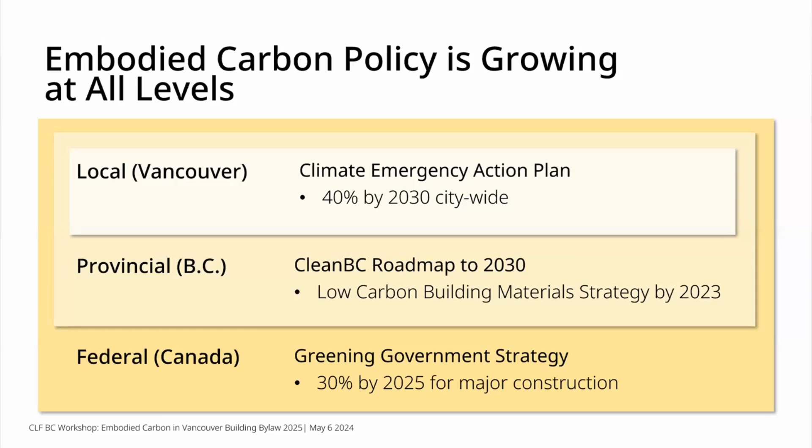So these are just a couple of examples. The federal government, for example, as part of their greening government strategy, has the target of reducing the embodied carbon of major construction projects, the federal projects, by 30% by 2025.

So for us, City of Vancouver, as part of our climate emergency action plan, we identified a few major actions. We call them big moves, and big move 5 basically addresses embodied carbon, which sets the target to reduce embodied carbon by 40% by 2030 for all the new buildings in Vancouver.

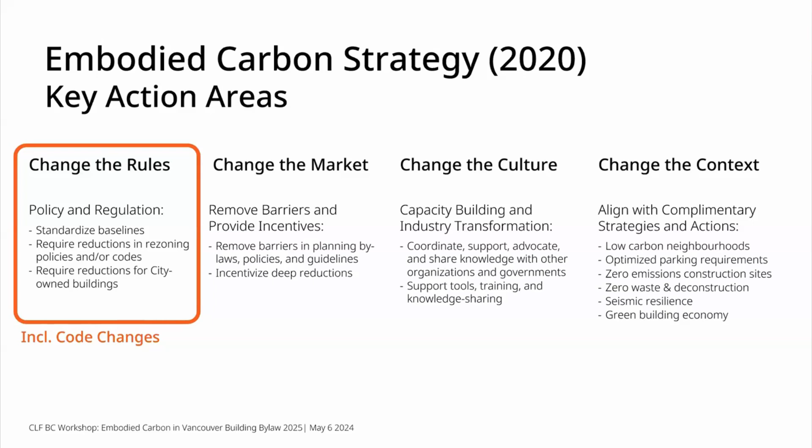The climate emergency action plan was released in 2020, and as part of it we also had an embodied carbon strategy alongside it, which identified the way we are going to achieve that target. We identified 4 key action areas. One of them was changing the rules, and that relates to the zoning, the codes, and the requirements that the city has, both for city-owned projects and also for all the other buildings in Vancouver.

The first step we took was back in 2022. We approved the first step, which came into effect last October 2023, where we started requiring embodied carbon reporting and set the first limit, which was less than double of a baseline following the embodied carbon guidelines. At the same time, we also brought to council our recommended approach for the 2025 step, which was approved in principle, but the details were to be brought to council later this year, which is exactly what we are sharing with you.

What we initially proposed was a 20% reduction for buildings that are up to 6 stories, basically lower rise buildings that can be built with wood, and then 10% for all the other buildings.

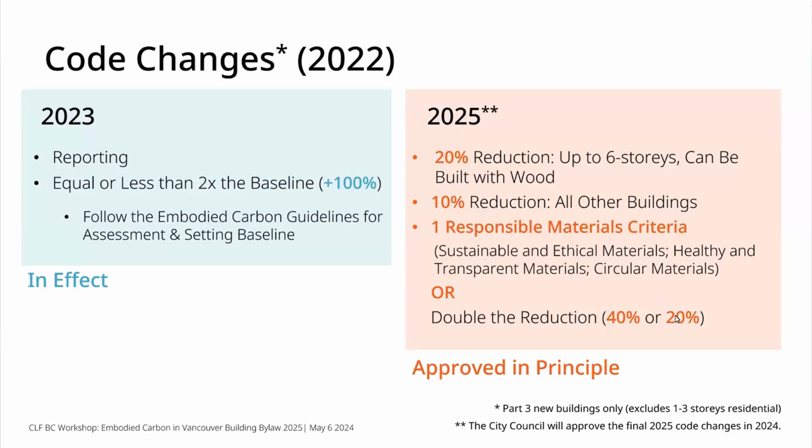We also had this requirement of responsible material sourcing criteria, a set of criteria we thought important to material sourcing and embodied carbon, but not very well addressed in the current systems that we have for embodied carbon assessment. So we proposed that each building meet one of those criteria or double the reduction requirements, which would bring the wood building requirements to 40% and all the other buildings to 20%.

We are very excited to see that the guidelines have been received very well throughout Canada. The federal government is looking at it, and CAGBC is looking at it.

So it's good that it created this ecosystem of making sure we are all aligning, and if there are variations in the approach, they're very clear and minimized.

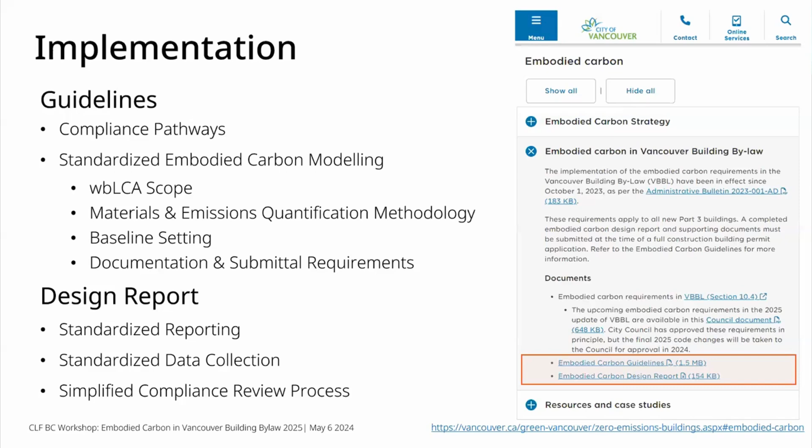This is all I have at this point. I'm going to pass it to our presenters to share their experience on how they have been assessing and reducing embodied carbon, how the current 2023 requirements of the Vancouver Building Bylaw may have impacted their projects, and what they see coming as we move toward the next steps.

After the presentations, I will come back and share with you our proposed approach for the VBBL 2025. What I would say is that I was quite excited to hear these presentations, and having the conversation with them, was to understand how these may apply to code.

So I'll ask you all to have that in mind as you're listening to the presentations, and then again I'll come back with the proposed approaches, and then we can discuss those further. With that, I'm going to pass it—let me actually first stop sharing my slide.

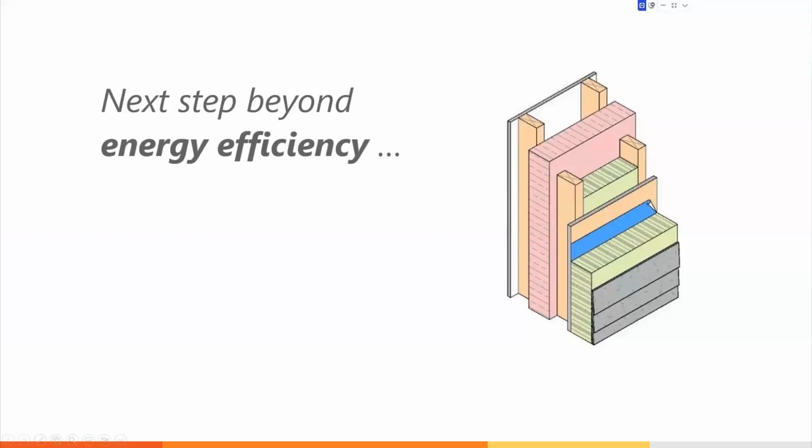Okay, can everyone see my screen? Doesn't... hang on, I think I got the wrong screen. Share screen. It's this one. Okay. Does that work? Okay.

Yeah, I'm Chad Cranswick, BC Building Science. Just want to share my experience as a building science consultant.

As you can see on the screen, this wall assembly was from a passive house we worked on many years ago, and it was kind of what started to push the passive house idea—what you'll notice is there's a lot of materials in it, a lot of wood and a lot of insulation, and that was to achieve the ultimate goal of super energy efficiency.

So this piece, embodied carbon, was in my opinion kind of missing from that, because those ultra energy efficiency single-goal ideas tended to ignore the responsible use of materials. So that's kind of what this is about.

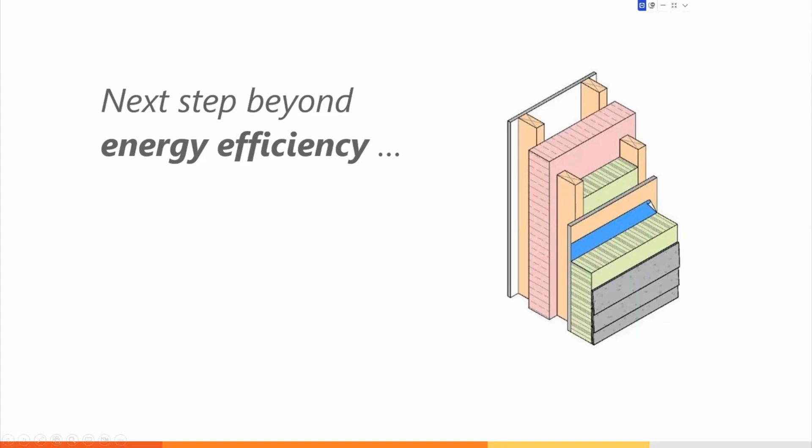So that's why I support what the City of Vancouver is trying to do here, or is actually doing. The goal is to focus not just on operations, not just operational carbon, but on materials as well. I think the two of them balance, and overall it's about responsible use of resources, whether it's energy or materials or anything.

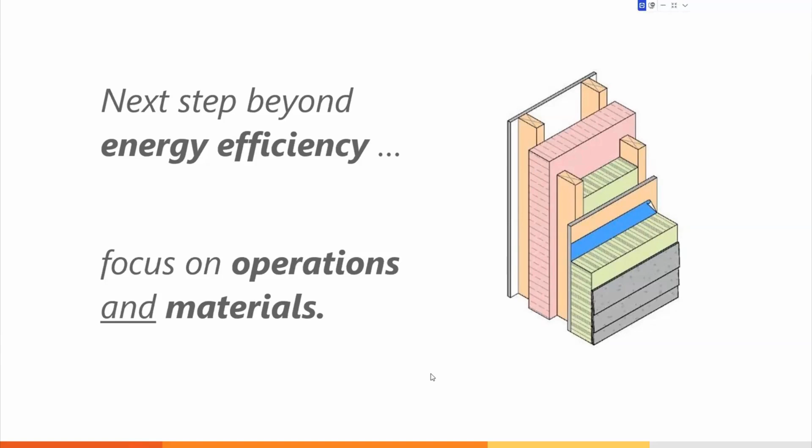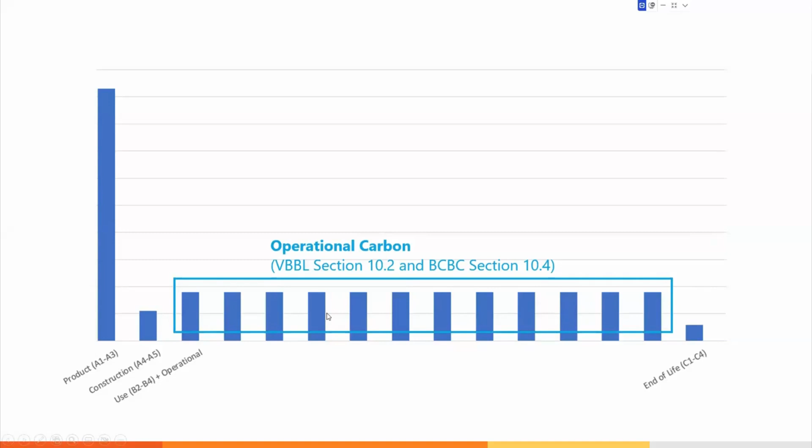This is basically operational carbon, what we've been dealing with over the life cycle of a building. These represent years or time along the bottom, and operational carbon is what we've been focusing on—that's what the step code deals with, trying to reduce the amount of carbon being used. The other piece is embodied carbon, and that's what's being addressed by this new—not so new—section 10.4.

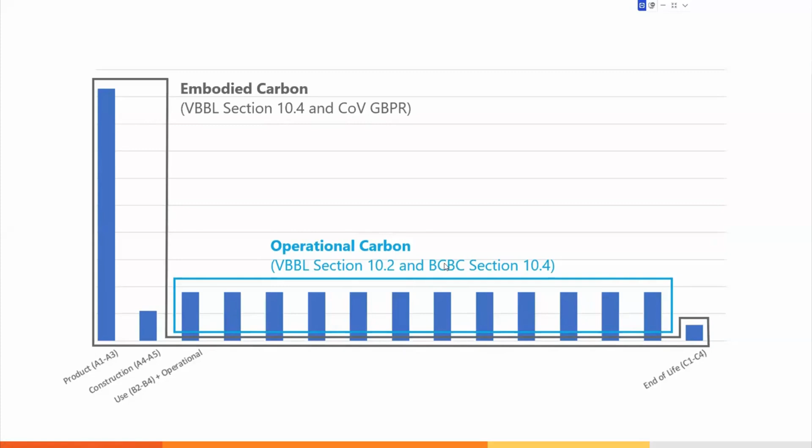And the City of Vancouver's green building policy for rezoning, which has been around quite a long time, but that's what it's trying to address. Does that make sense? This reminds me of financial plans, like a mortgage, where you have a high buy-in at the beginning, then smaller payments throughout.

So we just want to show two examples. One's a townhome, and this is a voluntary one we did internally. Townhomes, this type of building, actually wouldn't apply—as I understand, 1 to 3 story, it's slab on grade. There's not a huge component of concrete, but it was an interesting one.

This is a streetside Qualico development. We worked with E3 on it, and we basically did a bunch of presentations for the Township of Langley. I don't know if any of you were on them, but Streetside had agreed to turn a few blocks of the townhome development into step 5 net zero.

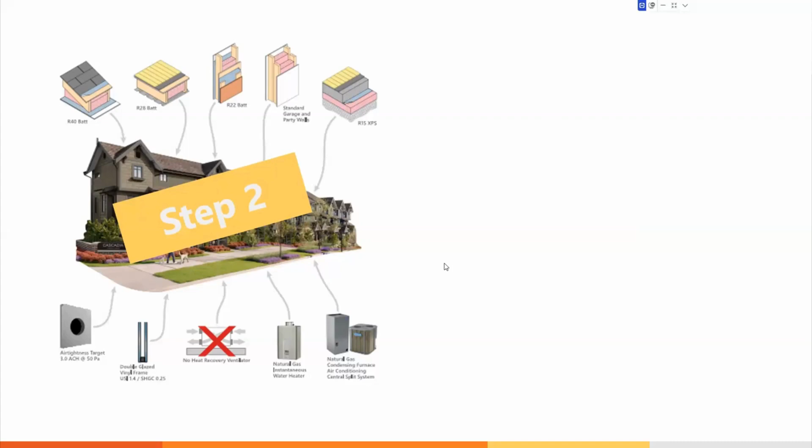Don't worry about all the details of this, but basically there's a step 2 block and a step 5—there's a few step 5s and a whole bunch of step 2s because that was the requirement. So the challenge was, how do we basically scale up the same architectural design, whereas a lot of the step 5s would be designed from the ground up and tend to form a certain geometry. We didn't have that luxury.

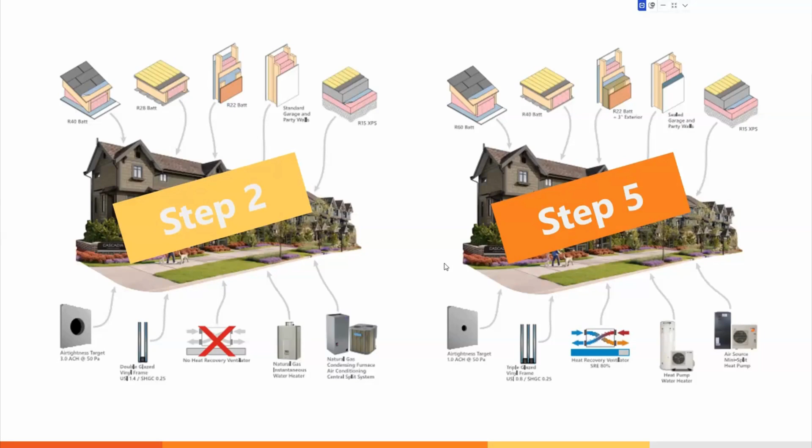So all we did was easy ones, like triple glazed windows and adding exterior insulation, but essentially they're the same, just with those few scale-ups to hit step 5. So we plotted them out together.

The embodied carbon: you can see step 2 is the yellow, step 5 is the orange. There's less investment in materials in step 2, because there's less stuff basically. But then over the life of the building, you're using less carbon, there's less carbon impact.

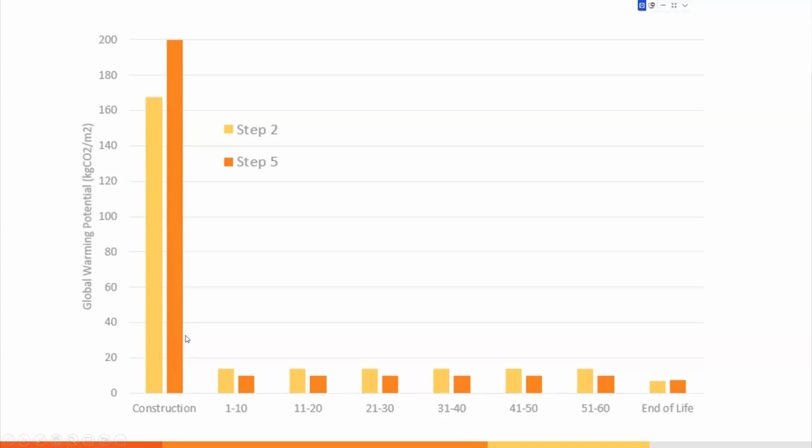So we thought if we add them together, we'll get the total. Step 2 obviously has total operational that's going to be worse, and step 5 is going to be better. That was the investment we made with this embodied investment. That makes sense, so embodied is of course higher on step 5 - there's more stuff, but there's the gain.

Thing is, when you put them together, you get an interesting result where there's actually a less global warming potential, less carbon essentially, on step 2 versus step 5.

Now there's an hour's worth of disclaimers about this, so we've thought about them all. This is how you calculate it, and this is the result you'd get if you follow the rules. But things like the embodied carbon calculation doesn't necessarily have a chance to be fully electrified, like construction, for example. So there's a lot of room there.

So as that gets a bit of pressure, you'll start to see these balance out a little bit better. Plus the error probably accounts for just that much. But the overall point is they're not that far off.

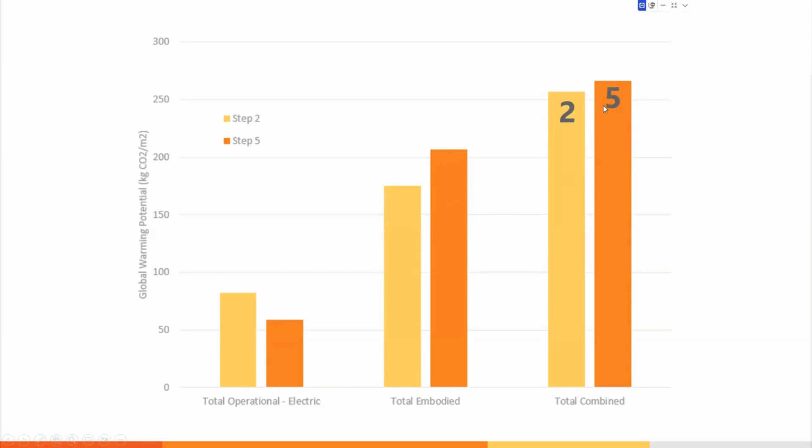So it makes you think, maybe, was it worth the investment? I think we've got to look at buildings a little bit more with it all in mind, not just drive towards step 5 so fast. Drive towards step 5, but do it with responsible use of materials. So there's a balance in there somewhere.

So let's look at a quick concrete one. I won't go through it too much, but we had the opportunity to model two steps - step 3 and 4 for a tower. This is all the details. Step 3, step 4: better air tightness, better walls, triple glazing. The details don't matter too much, but the solution is step 3 versus step 4.

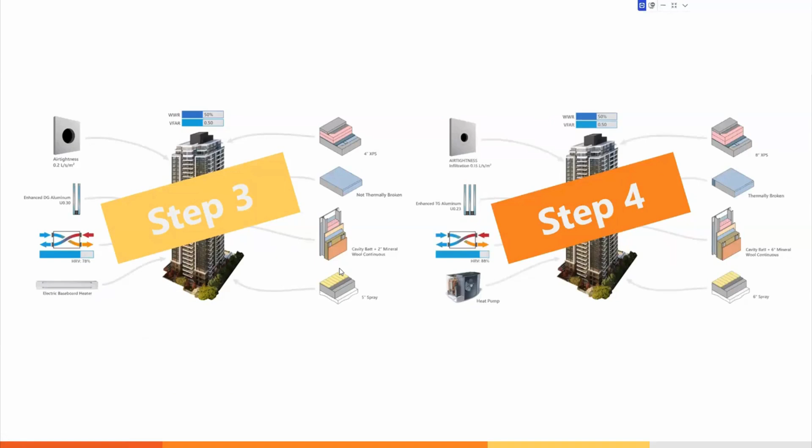So it's interesting - when it's electric, actually the lower steps have less impact. Very close though, and again there's disclaimers throughout, but they're kind of comparable. It's super clear when you get into gas though - when you take the gas and add it to the embodied, you end up with a huge incentive to go to higher steps.

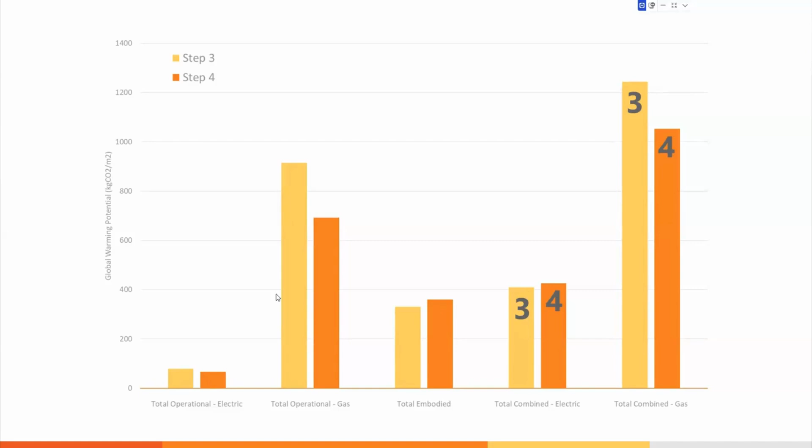So the underlying message is: if it's electric, it's less important, than if it's gas. But there's so much drive towards electric that we can actually start to think a little bit more about the materials themselves and driving that embodied down, because we've driven it down so much with the electrification of things.

That's all I wanted to say, and hopefully that was about 5 minutes. But again, overall, it's about, to me, pushing back on this ultimate idea of super energy efficiency, which is great, but think of at what expense - at the expense of too many materials in some sense. So that's it.

That's all I wanted to say for today.

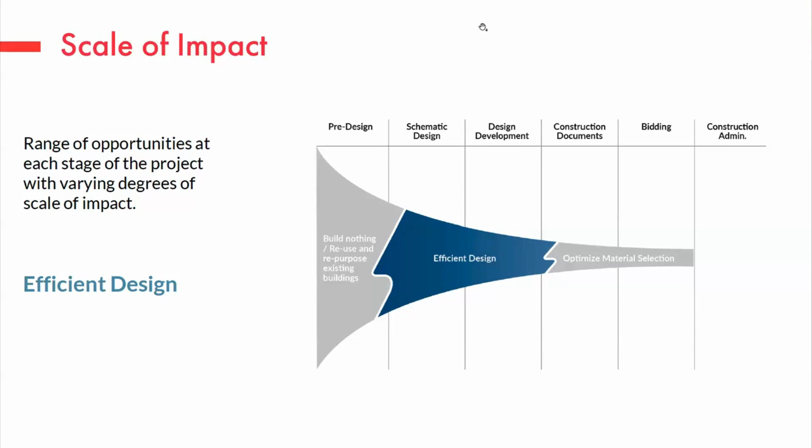Last but definitely not least is optimizing material selection. This really boils down to the selection of low embodied materials, such as low embodied insulation products, and or optimizing concrete mix designs.

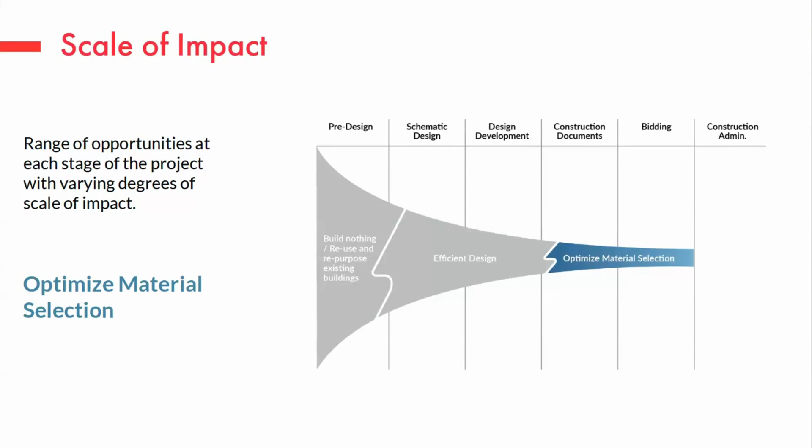We're going to walk through a couple of case studies now, and Amy's going to take the mic. Thanks, Iain. We just wanted to highlight two projects that we've been reporting on at ZGF that were demonstrating how projects were able to meet the 2023 VBBL embodied carbon requirements.

And one thing we want to highlight is that these initiatives have no projected additional costs to the project. So the first example we wanted to highlight - one strategy was, as Iain was saying, the volume reduction, and this was to do with the parkade.

So this project is the Vaha Seymour project, which is about a 9-story MURB building. You can see in the baseline we had 2 levels of parkade, so we were able to move to 1 level of parkade. That move in itself had a GWP relative to baseline reduction of 9%, which almost meets the VBBL requirements for 2023. That volume reduction is actually the most significant change that could be made on this project.

Then the second move for volume reduction was, as Iain was outlining, optimizing the structure, which involved reducing the slab thicknesses, aligning columns, and avoiding the transfer slabs, and that had an additional reduction of 3%.

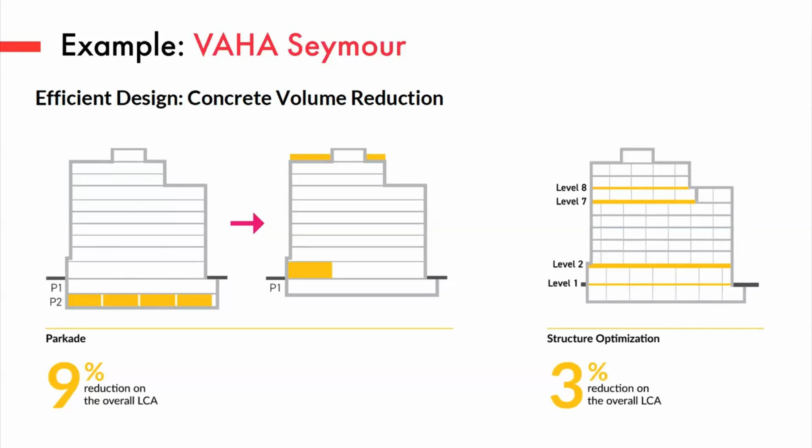Then we moved into optimizing material selection. The GWP from insulation was reduced in this case study by selecting just the CSA approved, Canadian sourced materials that already have a low GWP. We found that the GWP reductions relative to the baseline products could be as much as 80%.

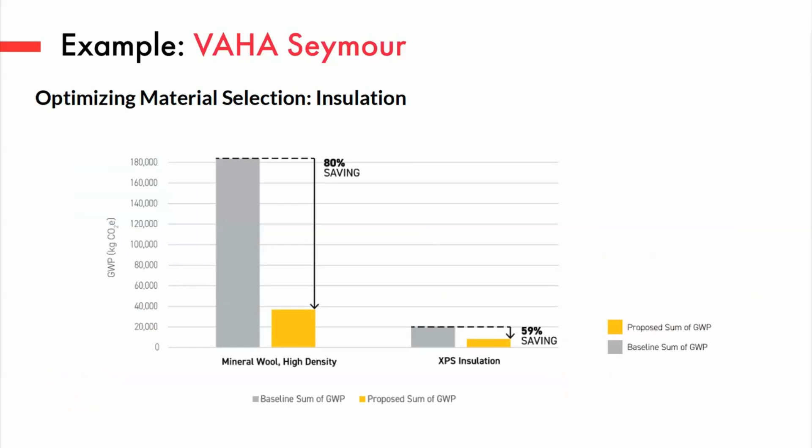So this slide is demonstrating the GWP savings from these different strategies we were highlighting here. The other strategy we incorporated into this case study was optimizing the concrete selection, which Iain is going to talk about in more detail.

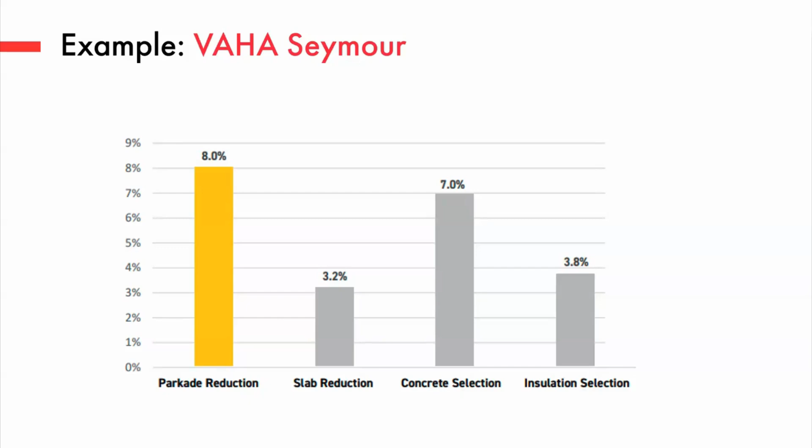Overall, when we did the whole building LCA, the results are showing the project's on track to achieve an overall savings of 22% reduction relative to baseline, so far exceeding the City of Vancouver's 2023 VBBL embodied carbon requirements. All of these options were done at no cost, and this case study is available on the City of Vancouver's website.

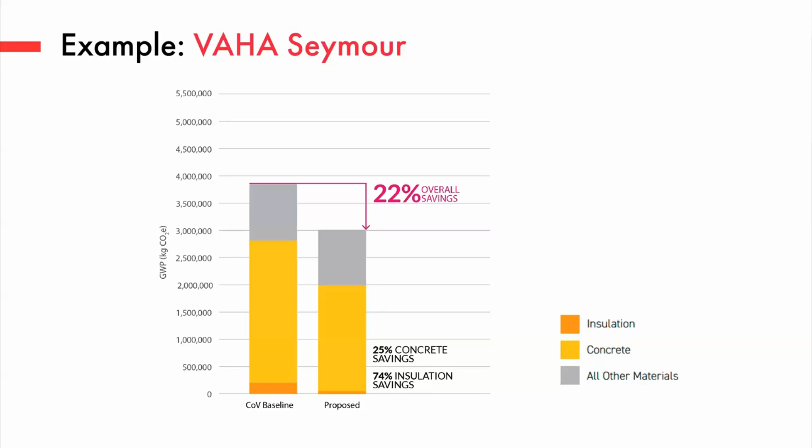Thanks, Amy. Just to reiterate that the savings for Seymour were at no cost, so the driver that we had on the project was to minimize any of the cost impacts associated with lower embodied solutions. So it really did make us think as a team.

This is a good bit of a break in terms of case study. One of the bits of pushback we typically get is concrete mix designs - it can't be done, it's going to cost too much, it's going to have an impact on schedule. So what we've been doing is pulling out those components and placing them into a performance matrix. This is a project from Surrey, so it wasn't meeting any City of Vancouver requirements, but it's the same thinking methodology that we use on all of our projects now - pulling out the constraints coming through from contractors and/or structural engineers and understanding what they are from a performance side of things.

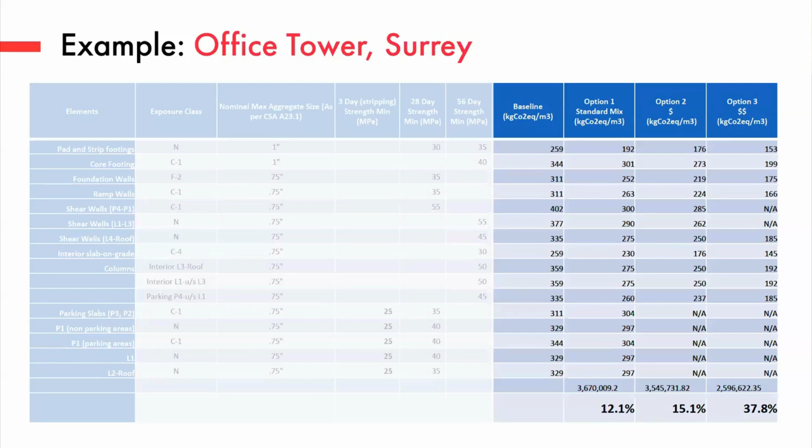We found that this has been pretty useful on projects. Ayme and I have got lots of examples, so we're happy to share after this. It was just a very quick 5-minute overview of some of the key lessons that we picked up. Thanks, Zahra.

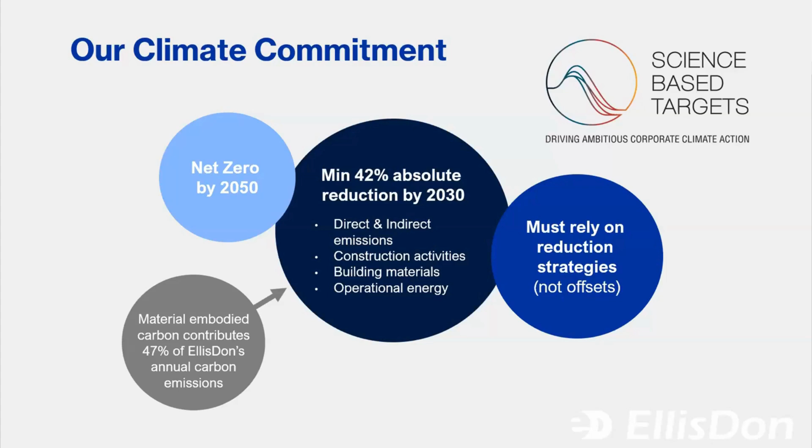We're really thankful for groups like CLF and the City of Vancouver for showing leadership and making it a lot easier for us to move the industry along this way. We like participating in events like this because we're all learning together and we're all moving it forward.

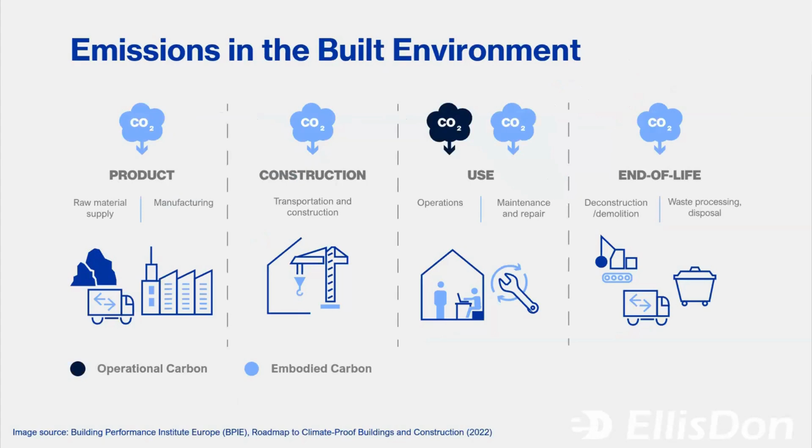So we've gone through this a little bit - what that life cycle stage is for embodied carbon. We know that we purchase products - that's the major part of the embodied carbon emissions, that first product stage. But also the construction stage is the one that us as a construction manager have the largest impact on. So I'm going to be talking about both of those.

This was touched on a little bit by Iain, and we'd see this from the consultants, but one of the biggest things we push towards getting the reductions that we want to get in a building project are performance-based specifications and not prescriptive specifications. As a construction manager, as a constructor, we need to buy what's in the specs - we are fairly constrained by that. Yes, we can have alternate conversations, we can do RFIs and all that, but it makes it a lot easier if the specifications are very, very clear about what they want from the beginning.

For concrete specifically, reductions should be mandated as a volume average reduction from a baseline and not mix by mix, if at all. You can give mix by mix recommendations, but we know that there are actual logistical constraints that happen when we are pouring the concrete on site and things that are very construction specific.

We would recommend that plant-specific EPDs be submitted. That really helps validate all the reductions being claimed, and it helps support the concrete manufacturers and plants. They've put the money in to get these EPD calculators, and we want to show them that we appreciate that. And then we want to avoid referencing specific technologies.

I know there's a lot of green tech companies out there saying really great things about how they're going to decarbonize the industry. Some of them are true, some of them are not, and we just want to keep the specifications technology neutral and more performance based. A really good example of this is the NRC's National Master Specification. Everybody in Canada has access to this, and they've provided a template with a performance-based section that's a very good example of how this can be written into specifications.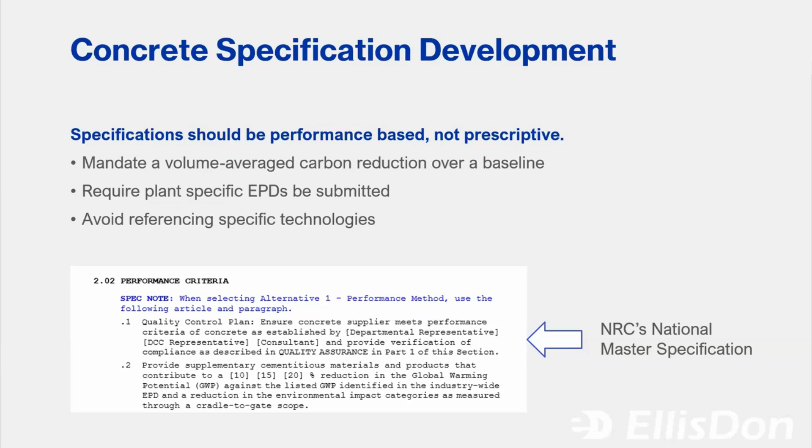Now, we know that there can be cost and logistic implications towards going to a lower carbon concrete. That doesn't mean there always is, but there can be. So in this process, what we're doing is having them submit their proposed GWP, or global warming potential, numbers, as well as any strength delay implications. Is it still hitting that standard 28 days or 56 days, or is it longer than that?

And if there's a cost premium or elevated cost per meter cube of concrete, then we're able to do a bit of picking and choosing from these unit rates to figure out the best way to get that lower carbon concrete on site. Or we can go with those unit rates going forward if we realize we need to tighten a little bit because something came over in an unexpected way.

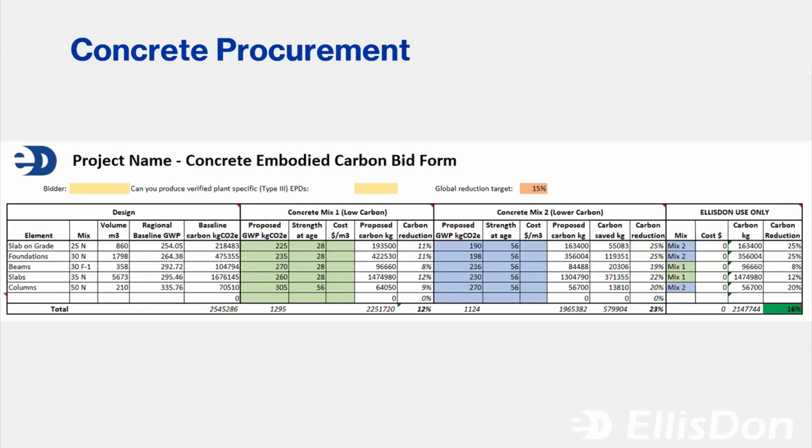And they want to know, hey, for how much more money can I reduce the carbon this much? And does it make sense for their project? Because you can buy offsets and stuff, but the best carbon is the one that you don't emit in the first place.

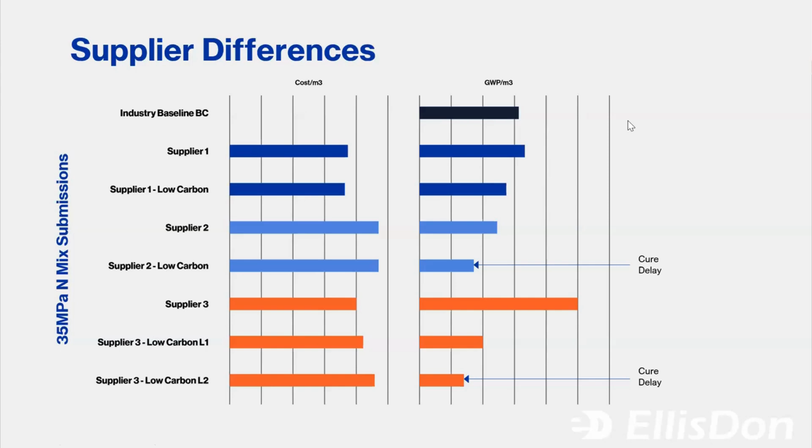So it allows us to be smart, basically, about the mixes we're picking and over the course of the building, getting those reductions that we need.

Of course, it's not just concrete. There are other materials to consider, the largest being structural in terms of embodied carbon density. So for metals, that's something we're working through a lot right now. We've seen some huge improvement in the industry over the last 12 months, honestly.

And we're seeing metal mills, brokers, and fabricators advancing their understanding of embodied carbon and the accessibility of the data. Largely, the data comes from the mills themselves, and then there's just a percentage increase applied for the fabricators. But mills vary widely depending on the location of their plants, their energy source, what kind of furnace or metal production system they're using, and also the percentage of recycled scrap in their metal.

So starting to ask for that information is really important. Other materials should be considered more in the design phase.

It is very much supplier to supplier dependent here, and there's not enough good quality data at this point in time to write procurement stuff into the specs. You might be reducing yourself to one supplier at times, though as the industry advances, this will change.

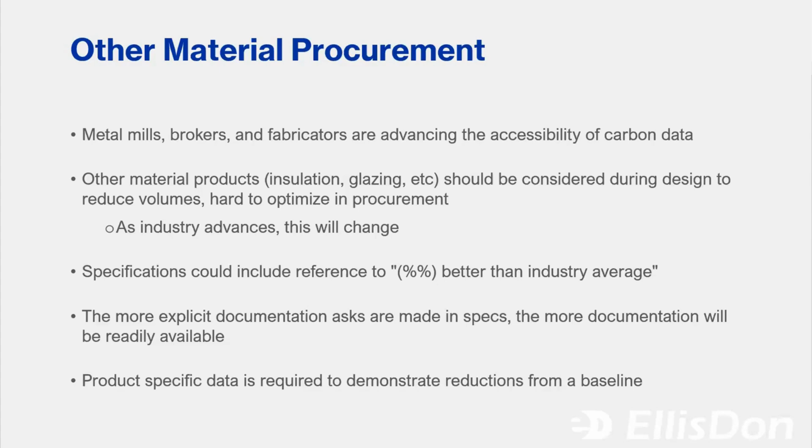Something we see frequently, especially in metals, is we'll ask for an EPD and we'll get the Canadian or American average EPD coming back to us, which is great if you're doing compliance things for LEED, but a baseline, an average baseline, can't show a reduction from an average baseline. So you do need that product specific data.

Finally, as I mentioned, I will talk about the transportation and installation materials. Construction stage data is very weak in the industry. It relies on estimated factors, and those factors vary from software to software, and there's very little consistency and very little understanding.

So the City of Vancouver wishes to better understand the real world impacts of construction processes and is incentivizing that developers and constructors track and disclose this data. I know that Zahra will talk about it a bit later, but when combined with other initiatives, up to a 5% leadership credit is available, and some of that is for tracking that A4 and A5 emission.

Currently, EllisDon is running pilot projects around the country, including many in the Vancouver area, for tracking those on-site emissions. Deliveries to site are A4, and fuel and power used on site are A5.

In order for us to get this data, what we do is we tie it to the monthly billing. It's part of our baseline contracts, though we only activate that on specific projects with the goal to eventually have it active on all projects across the country. We do tie it to the monthly billing because everybody wants to get paid, and it's a lot easier to get that data submitted when there's a little bit of a stick.

But also some of that data can be streamlined with logistics software, particularly delivery scheduling software. So in the Vancouver area, when there's going to be a lot of zero lot line projects or just issues with backing up on the streets, some of you might be using logistics software already. Examples are Voyage Control and StruxHub, and we are working with those companies to make sure that they have a way to track the carbon emissions associated with the deliveries.

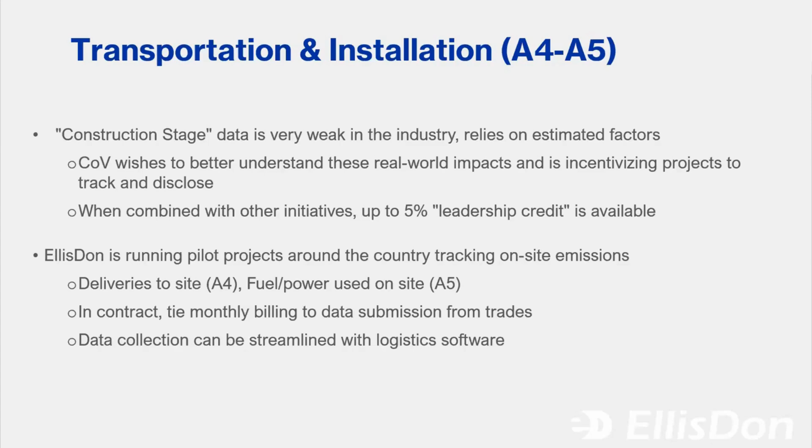We're not the first company to do it. They do have experience doing this, but we're working with them to streamline as much data collection and put as minimal a lift on the level of effort needed from project teams as possible.

Just a little bit of a show about what that tracking looks like. We have kind of a template data set up so that we can see the output of this tracking. How does it change from project stage to project stage?

What this does is that it really can help project teams identify carbon hotspots, and then put money or effort into the most impactful ways of reducing this carbon. It also can help initiate policies to reduce any carbon wastage. Examples of this would be anti-idling, battery power, faster grid connections, formwork heating, kind of all of those things. Things that are part of the construction process, but we might not be thinking about because we just have to do this to keep moving. If we're able to take a step back and see, wow, there's a big impact from this decision that I didn't really consider, we might make different decisions in the future.

So, just to clarify what we asked the subtrades to report in terms of fuel, and what we track ourselves, is any fuel consumption on site—liters of whatever kind of fuel, be it diesel, propane, that kind of stuff—as well as our energy purchases or usage. So if we have the data, we collect electrical grid connections or any fuel we buy to operate any of the equipment on site.

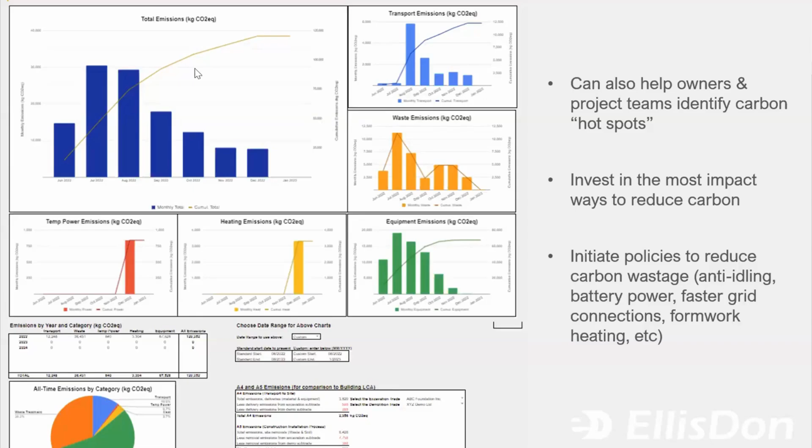And we are looking into alternative power solutions like hybrid generators or solar on site, that kind of stuff. We have some early stage pilots around the country working on that. And yeah, that's my presentation. Thanks.

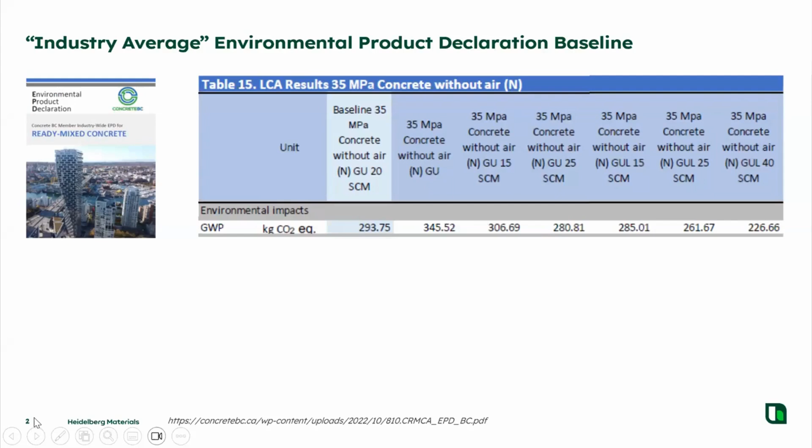But it's important to get a sense of how these reductions are both achieved and measured. The benchmark that the Vancouver Building Bylaw is using for concrete to demonstrate reductions against is the document highlighted here on the screen, the Regional Industry Average Environmental Product Declaration for ready-mix concrete. There's a lot of background into what exactly that entails, but essentially it's a report that outlines the environmental performance and carbon intensity of typical concrete mixes throughout British Columbia, including a recommended benchmark, highlighted in blue in this chart, as well as several alternatives concrete producers can point to as being indicative of their performance based on slight variations to the overall mix design.

Highlighted on the screen here is an example of a 35 MPa concrete application with no air entrainment, similar to what you'd see for an interior floor slab. The base mix for this concrete includes ordinary Portland cement, type GU cement, and 20% supplementary cementing materials, which would be either fly ash or slag, most generally in the Vancouver market. As a result, the carbon intensity of this particular mix is 293.75 kilograms of CO2 per cubic meter, and that would be the value that ultimately informs a whole building life cycle assessment's baseline calculations alongside all the other concretes and building elements that make up that project.

To demonstrate reductions against this concrete mix, concrete producers in Vancouver could go further to the right on this chart and show a 10% improvement on carbon intensity by testing that their mix will utilize Portland limestone cement, type GUL cement, and slightly more SCMs at 25% substitution. In British Columbia today, if a concrete producer is using local cement, Portland limestone cement is now the standard, so the cost implications of this move are essentially cost neutral. Similarly, with a 5% increase in total SCM use, you're going to see a 0 to very marginal cost increase, depending on the producer and their own supply chain considerations. Essentially though, 10% carbon reduction with concrete is possible at a very low cost, which generally means about a 5% reduction on the entire building.

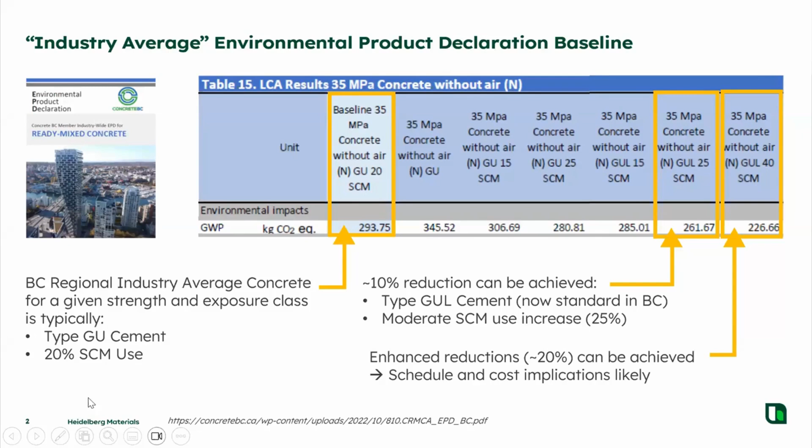Taking a bit of a step back, looking at where the industry is relative to the rest of Canada, we've come a long way in recent years. British Columbia has demonstrated a very significant reduction in average carbon intensity of concrete when compared to the Canadian-wide industry average report that was generated back in 2017.

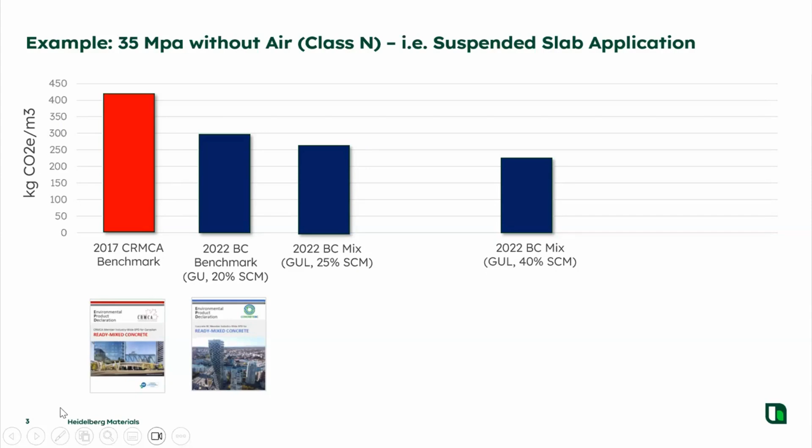In fact, British Columbia is among the lowest carbon concrete in Canada as it stands, largely due to the use of local cement production and some of the geographic advantages from a climate perspective, and the transportation of raw materials, such as water-based transportation of aggregates, at a lot of our concrete facilities. Picking up from our industry action plan, which Matt Dalkie is going to delve into in more detail, the cement plants in the Lower Mainland are already producing Portland limestone cement as a standard and utilizing lower carbon alternative fuels to reduce combustion emissions. This has resulted in relatively low carbon cement versus the rest of Canada, but also indicates that much of the low-hanging fruit that exists for the cement industry elsewhere in the country has already been taken advantage of in the Lower Mainland.

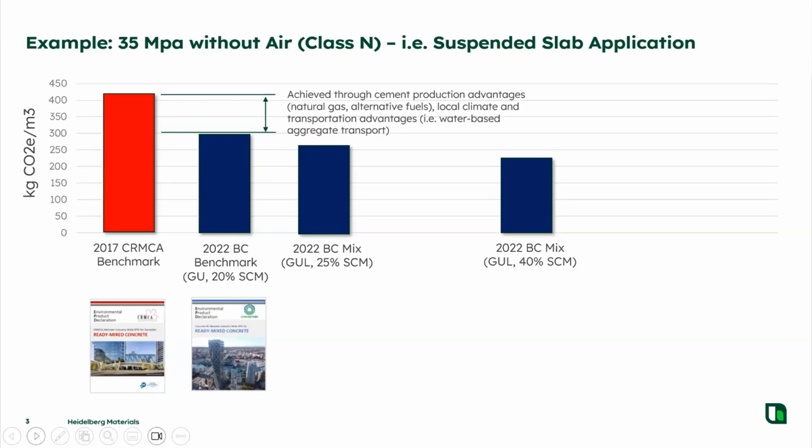On the screen, we can see how the BC regional average concretes highlighted from that last slide compare against the past.

Each supplier is definitely going to have their own capabilities and supply chain considerations. But again, if we work directly with designers and contractors to achieve the targeted level of carbon reductions, we can manage the schedule and cost implications to best suit a given project.

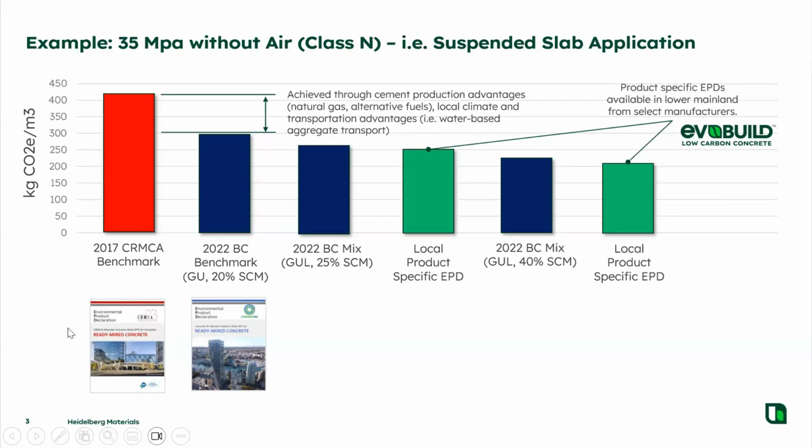In the not too distant future, cement and concrete will soon be able to deliver even more substantial carbon reductions across Western Canada. A number of carbon capture, utilization, and storage projects are currently under development across North America, including Heidelberg Materials' Edmonton, Alberta facility, which is currently targeting completion by 2026. This is a first-of-its-kind project that's going to see the capture of 1 megaton of carbon emissions annually from the cement production process, ultimately enabling net zero cement production by 2027.

While this product is much more likely to have a substantial cost impact at a product level versus some of the other alternatives we're highlighting here today, it still has the potential to reduce the carbon emissions of a project by up to 50% at a relatively minimal project level cost. I understand this isn't necessarily a pathway everybody's going to choose for their given project, but it does demonstrate the cement and concrete industry's readiness to provide solutions to support performance against embodied carbon regulations coming out both now and into the future, as they continue to grow more stringent with time.

So with that, happy to turn it over to the next presenter, and thank you very much.

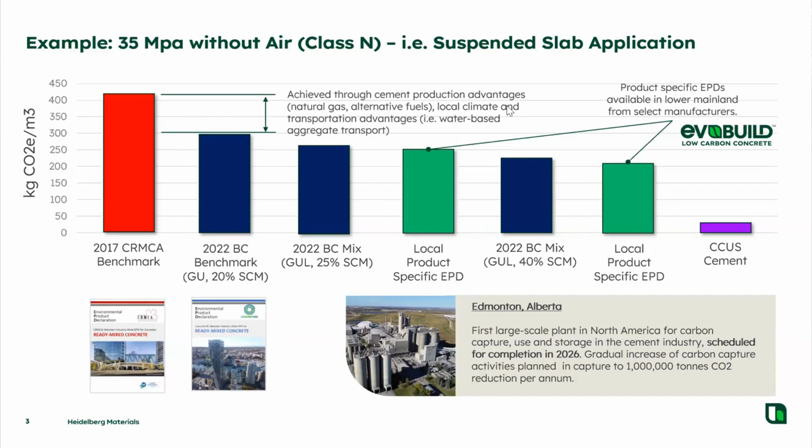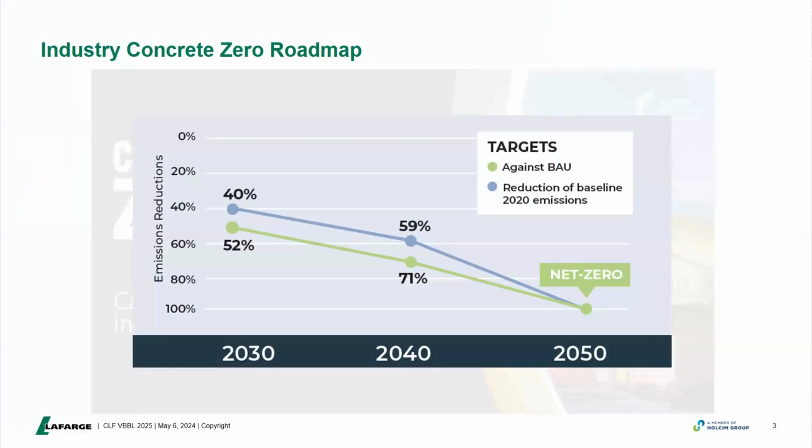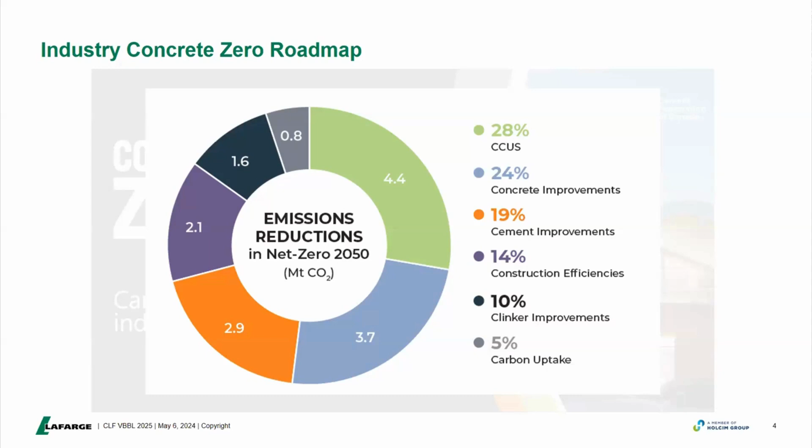That reduction is broken down into a number of different areas of specific interest to the Vancouver area, and the bylaws will be cement construction efficiencies and concrete improvements - the 3.7 and 2.1 in purple. Those have the most impact or influence as far as the policy that Vancouver is putting in place.

As far as recommendations for policies, from a Lafarge perspective, we recommend that any policies are material agnostic and should treat all structural materials equitably, and focus on performance outcomes. In this case, we really want to focus on functional equivalence of different building systems.

We recommend that policies strive to recognize improved structural resiliency. By this we mean that if you are building a building out of a combustible material, for example, or something not as durable as concrete, that is recognized - if there is a wildfire, flooding, or earthquake, different structural systems will react differently. When you're looking at concrete, that tends to be much more resilient, and we're able to return the structure to use earlier after a significant event.

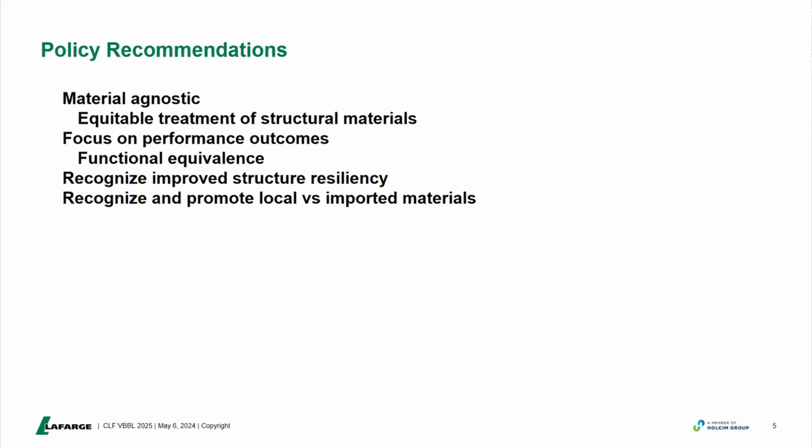We also want to promote local versus imported materials and recognize that as well.

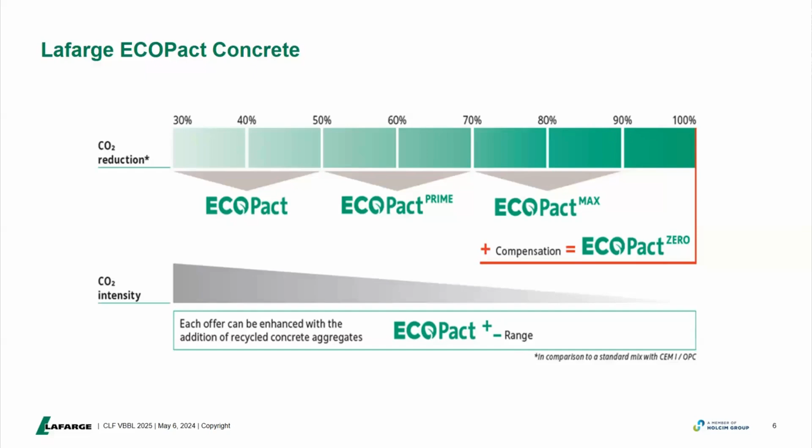Now, Shane did point out that Lafarge does have our EcoPact range of concrete. We start on a basis of straight OPC cement as a comparison. A 30% reduction versus OPC cement brings our EcoPact product. When we achieve a 50% reduction, that's our EcoPact Prime product, and 70% and above is our EcoPact Max product. That's the different ranges we have, similar to what Shane was showing before as far as the numbers you see in EPDs.

Just to look at those in a little more detail - the reductions are achieved through the use of GUL cement, which Shane was talking about. We leverage our experience over several decades of concrete production and optimize the use of the types of aggregates we are using and how they are blended together.

Our production in the Lower Mainland predominantly uses NewCem SCM, a slag-based SCM, as a way of reducing the cement content in the concrete. We also leverage our experience and partnership with admixture suppliers to optimize the use of admixtures to further reduce the amount of cement in concrete.

As far as costs go, generally speaking, for our non-EcoPact concrete, they tend to have somewhere in the order of 5 to 10% embodied carbon reduction compared to industry-wide EPDs. But when looking at higher reductions above that and using EcoPact concrete, costs can vary depending on strength class. We recommend from a budgeting perspective to allow for a 5% increase in cost, which should more than cover the potential elevated costs for using EcoPact concrete.

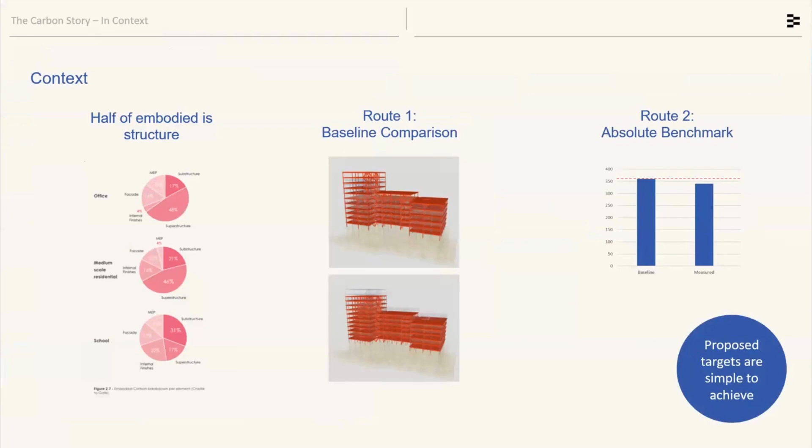As context, there will be some parallels with what people have spoken about before, but generally speaking, for buildings, particularly Part 3 buildings, embodied carbon of the structure is going to be at least half of the total embodied carbon on the project. It varies a bit depending on the scale of the building, but that's a big part of why reducing carbon in the structure is seen as critical to hitting those targets.

Building on the information Zahra was talking about earlier, the proposed clauses that are part of the 2025 Vancouver Building Bylaw give two routes for projects to demonstrate embodied carbon compliance. The first is a baseline comparison where you take a functionally equivalent building, demonstrate through design changes that you've saved carbon, and then demonstrate the reduction that route. The other alternative is the absolute benchmark of just quoting the overall embodied carbon per square meter.

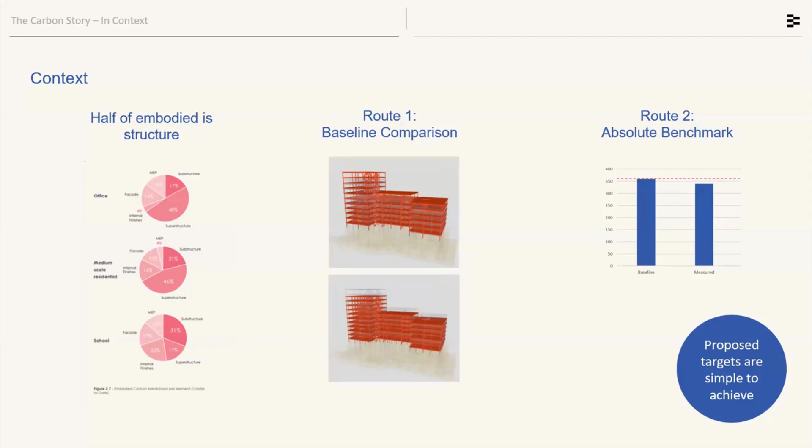I think the main message from me would be that a lot of our focus from a sustainability point of view is towards 2030 and beyond, and that's where lots of this research and development is coming from. But the initial targets being proposed for Vancouver for the 2025 code should be seen as quite simple targets to achieve. They're a stepping stone into something much bigger, so for now 2025 shouldn't really be of great concern for people on this call.

Often the advantage of that is reducing material can quite often save money as well as save carbon, so there's a design incentive for us to use materials efficiently. How we do that takes a number of ways, but refining the structure can mean reducing the spans we have, which has a quite big direct impact on the amount of material in a building.

Removing transfers is talked about a lot, and that requires the buy-in of the whole design team and client. Changing the floor framing is a slightly more subtle art, either using point-supported structure or playing with the beam framing layout to save material. Another big impact is reducing basement volumes, and the City of Vancouver have been changing policy to help with parking minimums and reducing basement volumes.

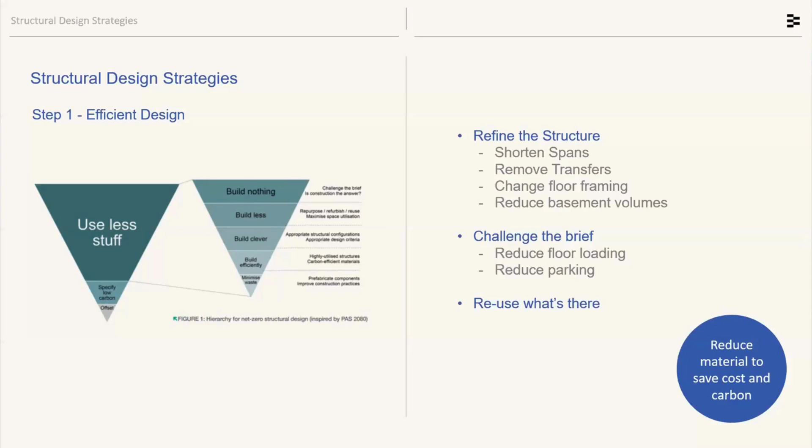Reducing parking I mentioned, and then a big part of the conversation for post-2030 is how we utilize reusing what's already there—strengthening and upgrading buildings, reusing reclaimed materials. Timber and steel in particular lend themselves to that, but there's also opportunity for reusing aggregate.

To put some numbers to it, from a structural efficiency point of view, there's a good study produced by Buro Happold looking at a mid-rise concrete structure based on a flat slab 9x9 grid, that looked at the impact of, firstly, reducing the column grid. They found that for every reduction of 1.5 meters in their column grid, they were saving about 20% in the overall embodied carbon of the structure. So your structural engineers should certainly be looking at column grid very early in the project if embodied carbon is an incentive, which it should be.

Reducing column grid, really refining that imposed loading, again, slightly smaller advantages by refining your loading, but a project that is able to shave down the loading could potentially be saving 10% on the materials through that.

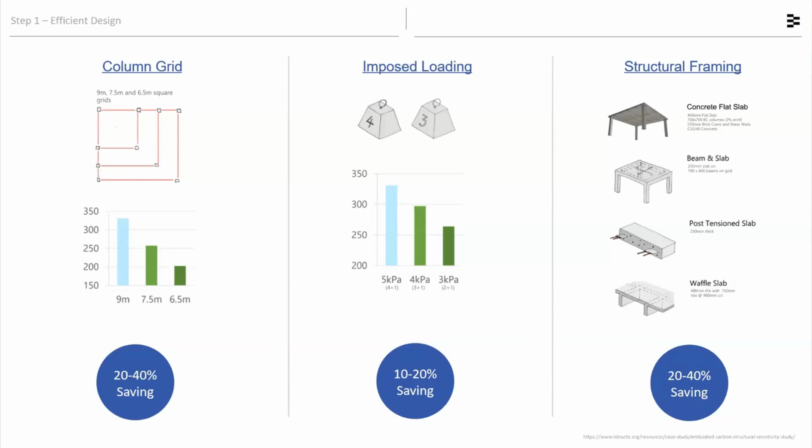The third big thing is the framing layout we choose to use as structural engineers. In the Buro Happold study, they found that going from a concrete flat slab to a beam and slab structure represents a more efficient use of materials, a smarter use of structural depth. Alternatively, going to post-tension slabs rather than just flat slabs is also a pretty good strategy if you're restricted by building height, or trying to keep the same building height. So main message being, it's not just about materials. The structural engineer can help you a lot if you're trying to drill down that embodied carbon. Have those conversations early, and really use the form of the building to help you achieve targets or demonstrate reduction.

The second point has been talked about quite a lot today, so I'll try to keep it brief, but specification should come second, but is no less important. With concrete, as Shane and Matt have mentioned, there are savings to be had, and in Vancouver now the Lafarge and Heidelberg cement plants are both producing only GUL, so make sure that's accounted for in your calculations when reporting carbon. A big thing we found that helps developers is to set a total carbon budget on our project, then work with the developer and suppliers to decide where to put any SCMs on your project, rather than dictating as designers to the contractors where they are and having negative effects on a program.

Steel, so the local steel supply comes from across the border in Seattle, and that plant is an electric arc furnace plant. Be aware that electric arc furnace steel typically has a lower carbon impact, so take advantage of that when you're doing your calculations.

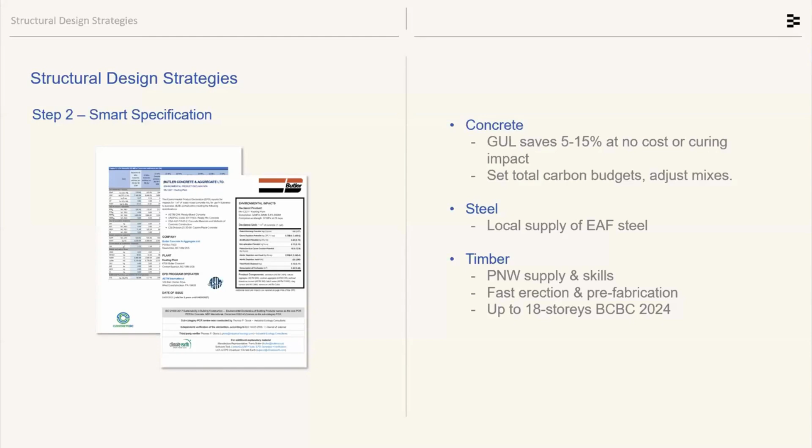And finally, when it comes to timber, Vancouver and the Pacific Northwest are really a global leader in mass timber. We have not only the materials here but also the skills to design with mass timber and erect it. The upcoming BC code for 2024 is going to permit up to 18 stories of encapsulated mass timber. So there's quite a lot of innovation ongoing in all materials that can help you achieve, and actually exceed, some of those targets being discussed.

Quickly again, to mirror what Matt and Shane have talked about: for even a 15% SCM mix, you're looking at about a 20% saving versus a standard GU no-SCM mix, and there are some quite big savings to be had if you want to do them.

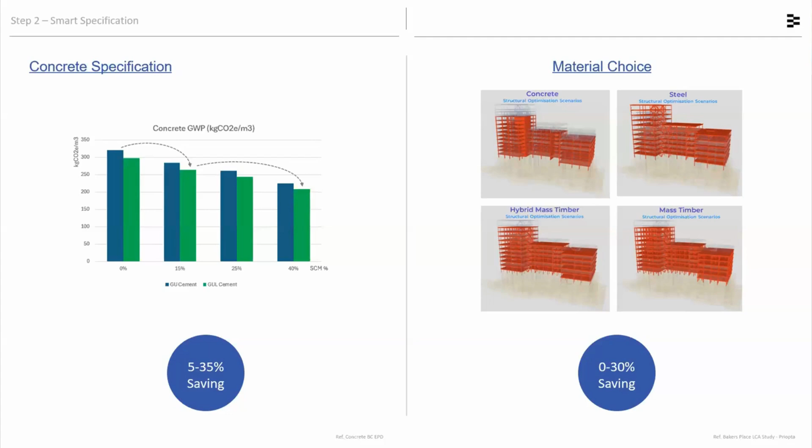I'd also highlight, in terms of materials, a study we completed for a project just across the border in the US, where we were looking at a comparative baseline study. We were able to demonstrate a 30% saving by going from, in that case, a full steel concrete structure down to a hybrid steel and mass timber structure. So there are lots of different routes, whatever works for your particular project, to demonstrate savings and save carbon beyond just specifying a particular material.

And then finally, I wanted to give some signposting towards the long-term view when it comes to structural engineering and where the industry will be in 5 or 10 years' time.

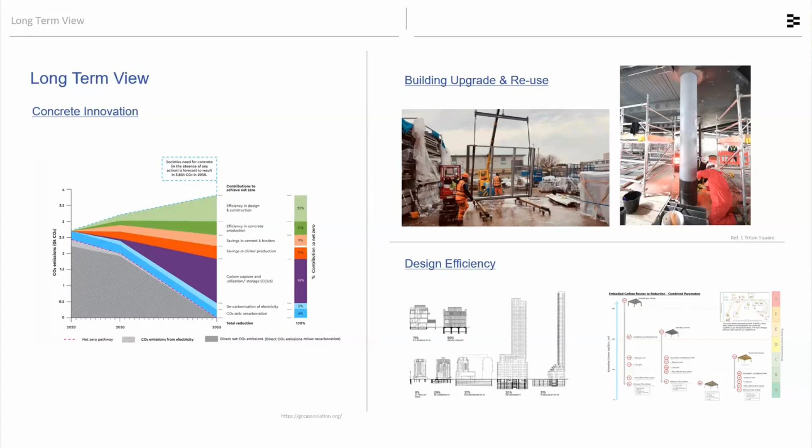There are also changes going on to look at reducing basements, reducing transfers, all things you can do now but will need to continue to be done moving into the future. Thank you.

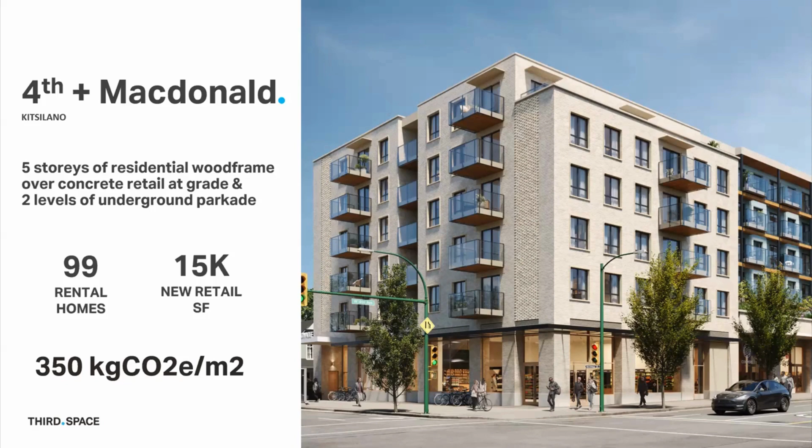As this slide shows, and as Priopta had calculated - Anthony can speak to the details better than me - our baseline, meaning just where the building sat before any measures to mitigate embodied carbon, was about 350 kilograms CO2 per meter squared. This isn't to be confused with the baseline as calculated by the policy that Zahra and her team are proposing, but that's where we started, without any measures at all.

And we're moving ahead here. So the first thing, as everybody's mentioned, is structure and concrete - it's the biggest thing to address. Luckily, we had a great partner right off the bat with Glotman Simpson. I saw Harrison on the call earlier.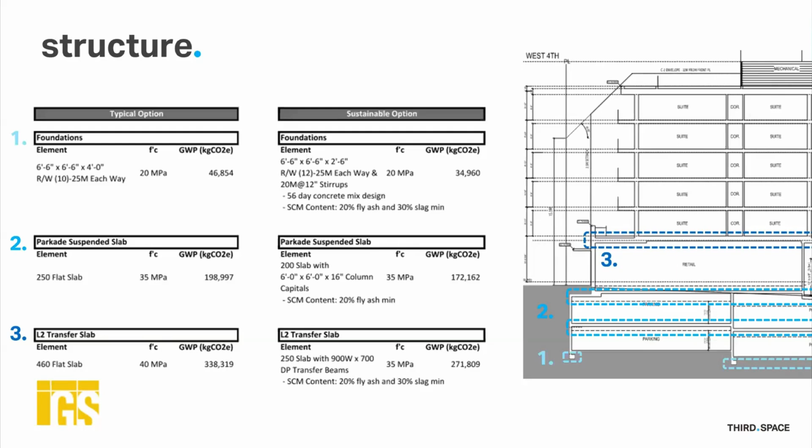So they came to us right out of the gates, in terms of initial design, with 3 real options to try to reduce our embodied carbon, and ultimately reduce concrete in the building. We looked at foundations, the parkade suspended slabs, and the L2 transfer slab, which is highlighted in the image on the right.

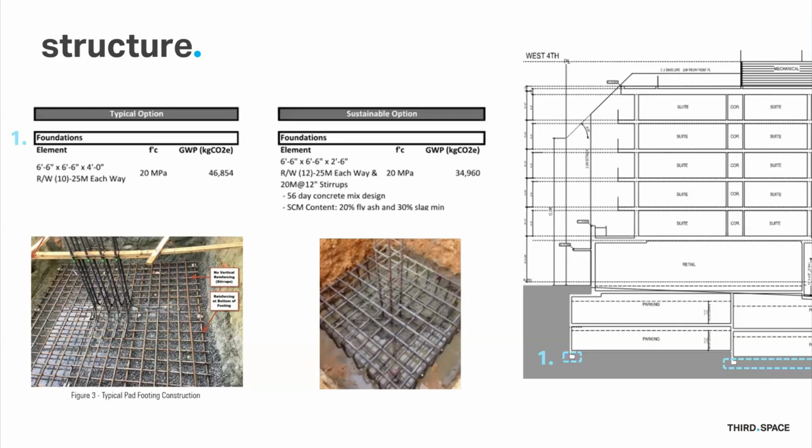The first one - and as Harrison can speak to again - perhaps not an ongoing strategy given the updated seismic codes, but we looked at reductions here, partly through mix, but partly just design. This is a trade-off between essentially rebar and concrete volumes, but again, just trying to drive down the use of concrete. We also looked at the parkade suspended slab, which is really moving to column capitals.

So what you're trading off here is a 10-inch flat slab - this is what you'd traditionally see throughout parkades in the Lower Mainland. It's super easy to form and easy to coordinate services. Whereas on the right, you have 6x6 column capitals, and you can reduce that 10-inch slab down to about an 8-inch slab, with some different mix in there as well.

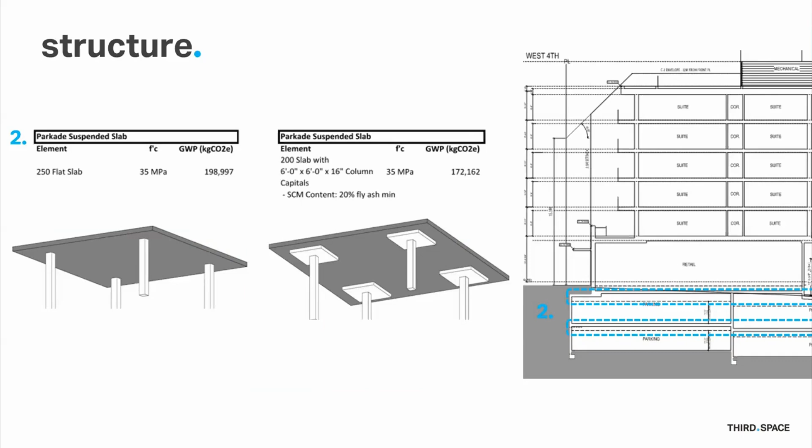And then the transfer slab - I think Tom mentioned this as well in terms of strategies. We looked at trying to go to a beam system instead of just a flat slab. We were limited in height, both in our zoning and also in our requirements from the future tenant, so we didn't go to this option in the end, but we did have it costed out.

So our build partner Axiom had a look at these initially, just to see where we were early days ballpark with these strategies, and a pleasant surprise was there's a bit of savings here. This isn't a huge number on the whole, but it's enough to say we can go ahead with this and we're not really risking massive premiums.

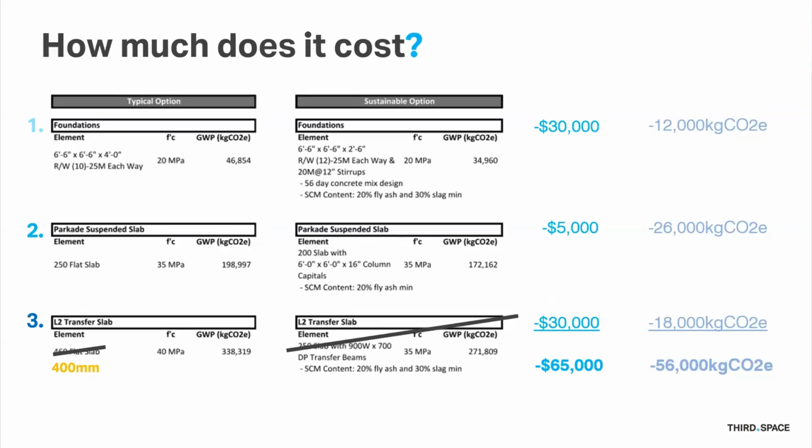And as I said, we didn't really go to option 3, but through simple manipulations of the structure, Harrison working with the architectural team, we took that 18-inch typical transfer slab down to a 16-inch slab, with some reductions in there as well. So overall, without a ton of work on our end and any cost, potential savings, we had about a 9% reduction from concrete and rebar in the building. Again, not huge numbers, but honestly things that are super easy to do and easy to implement across our projects moving forward.

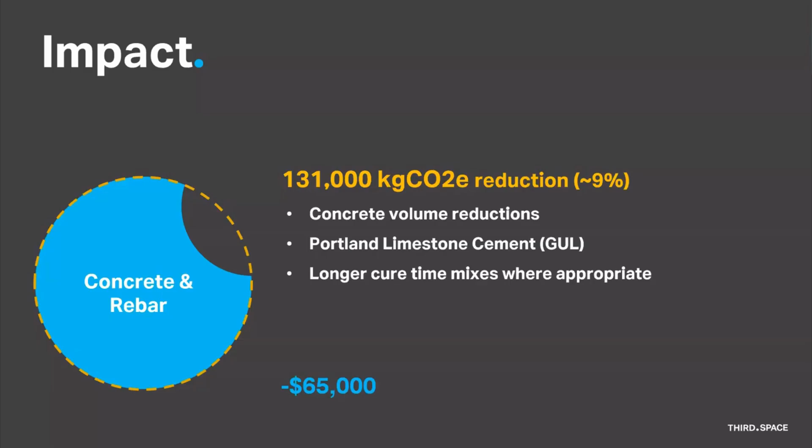And the second one - this actually goes back to Chad's presentation and whole life carbon, combining both the operational emissions and the embodied, and a lot of good discussions in the chat here. As you can see, our baseline wall had 2 inches of exterior insulation, not a lot.

But as we've already committed to an all-electric building with a really dominant mechanical system, we've also committed to putting cooling in all of our buildings. So that often leads you to heat pumps or similar, which are mechanically dominated systems in terms of the energy efficiency design. You can see we're exceeding the code requirements by quite a bit.

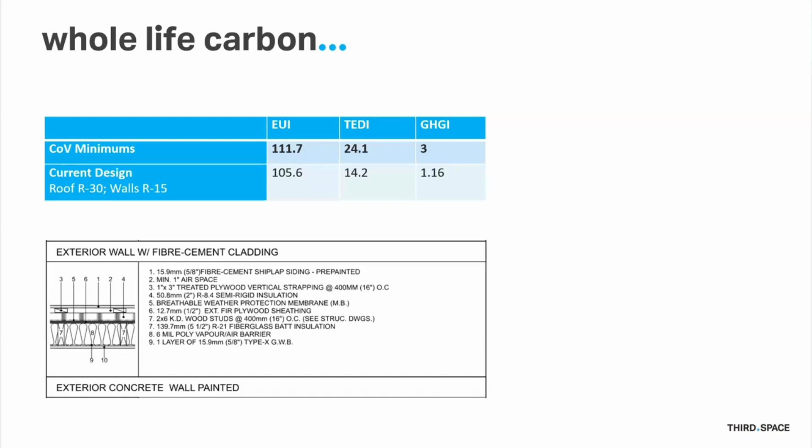So we did look into various strategies to see what the trade-offs were if we took some insulation out of the building. As you can see here, we could have an immediate reduction of about 30,000 kilograms, or about 76 kilograms per year increase. In simple math, as people would caveat, that's almost 400 years to take that savings back.

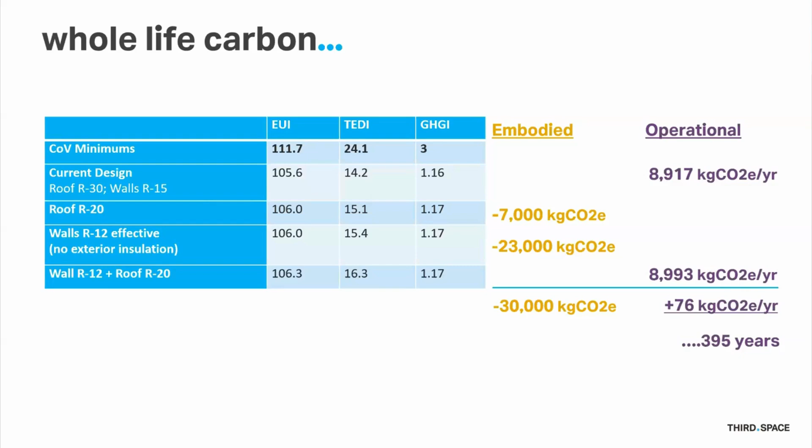So on the surface, a very easy decision, not really one, as people have mentioned. We looked at this from a number of different lenses before making a decision. The first one is thermal comfort. Does that 2 inches of insulation coming off the exterior, off the roof, make a big difference? Very minimally, honestly. The windows are the weak point right now.

That is still the main issue, especially with your exterior walls being primarily window at this point, in terms of where people are going to sit and feel that temperature difference. We also looked at whether that affected equipment sizing, and it didn't.

We ran the building in a 2050 energy model in terms of the climate file. Lots of debate about whether that's hot enough. It's probably not, but again, the mechanical system could still keep up. We ran it in a power outage scenario. Very marginal difference between 2 inches of exterior insulation and not having it.

We even had our acoustic consultant have a look at it and comment on whether or not that would make a big difference. Again, it's really windows, and not so much the design of the windows themselves, but also just the air tightness that speaks to that as well.

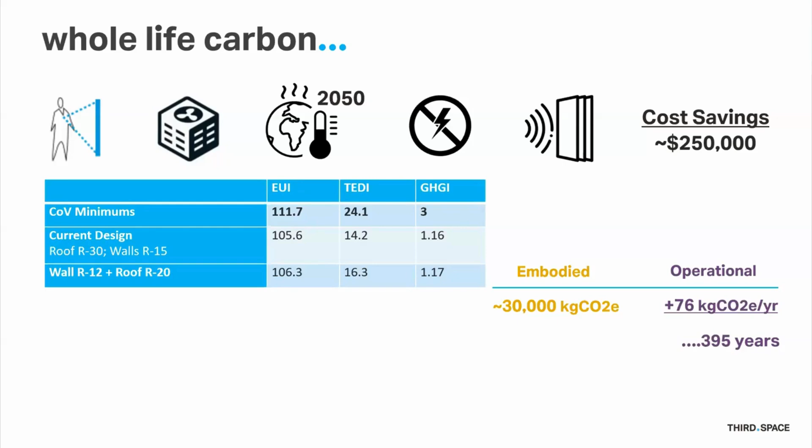Now the big thing, and we've had this conversation with Chad, who's obviously on the call, is durability and how much we're sacrificing for this initial capital cost savings over time. We know that the exterior insulation will protect the membrane and hopefully improve that air tightness over time.

Unfortunately, we just don't have a lot of data either way to stand behind when we're looking at these decisions. And certainly we're looking at trying to minimize our costs. There's currently kind of a runaway train right now in terms of the upfront capital costs of construction. So we did, in this case, elect to take that savings, but not without a whole lot of consternation and studying.

I wouldn't say this is just a no-brainer going forward. You really need to look at this in depth and see whether or not it makes sense for your project. But I think there is a lot of synergy between embodied carbon and trying to reduce your capital costs. It's ultimately just about trying to use as little as possible, and that should translate into capital cost savings.

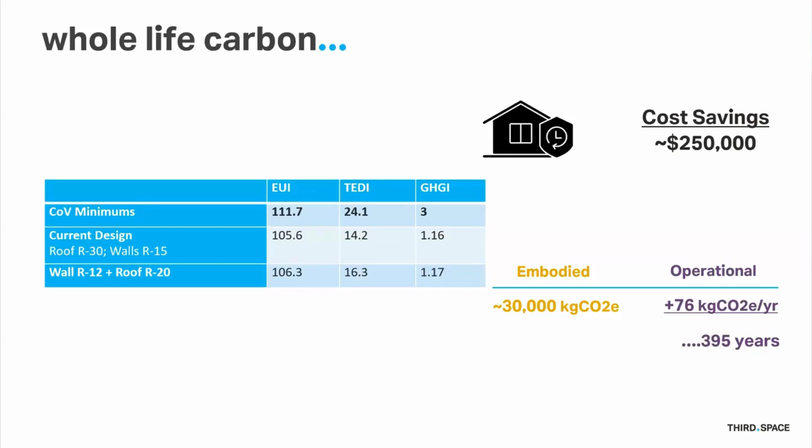So overall, the insulation being the biggest factor, the hardest one to quantify, but overall we were easily able to get about a 9% reduction in our carbon. And again, that's from our own baseline of 350. So we're looking at pretty much a 20% reduction from that 400 kilogram CO2 per meter squared baseline.

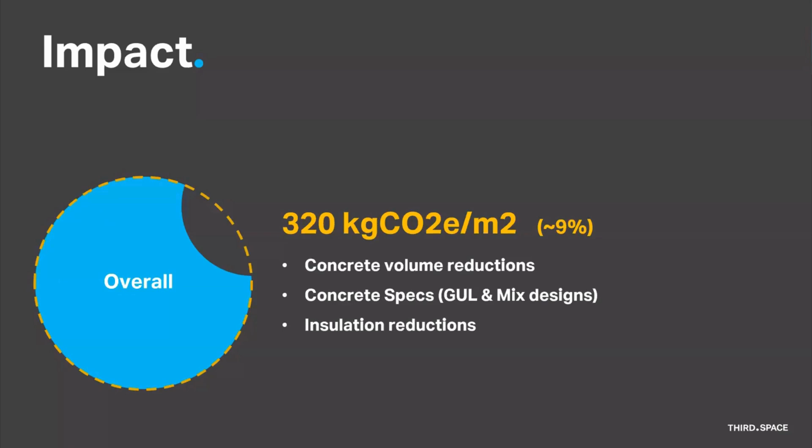And at worst, it didn't cost us anything. And at best, we actually saved a little bit of money along the way. That is the end of my presentation.